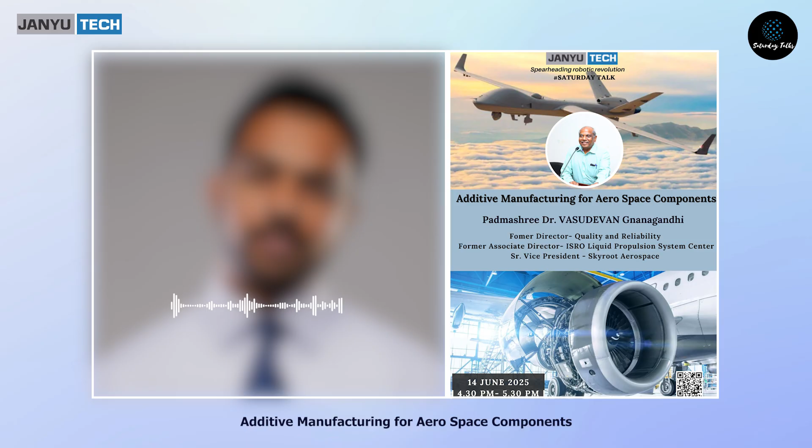He is involved in the realization of hydrogen bus with Tata Motors and has conducted the first trial run. His strengths are giving lectures on rocket propulsion. At present, he is associated as the Senior Vice President, Propulsion at Skyroot Aerospace as well. And today he is going to speak on additive manufacturing for aerospace components.

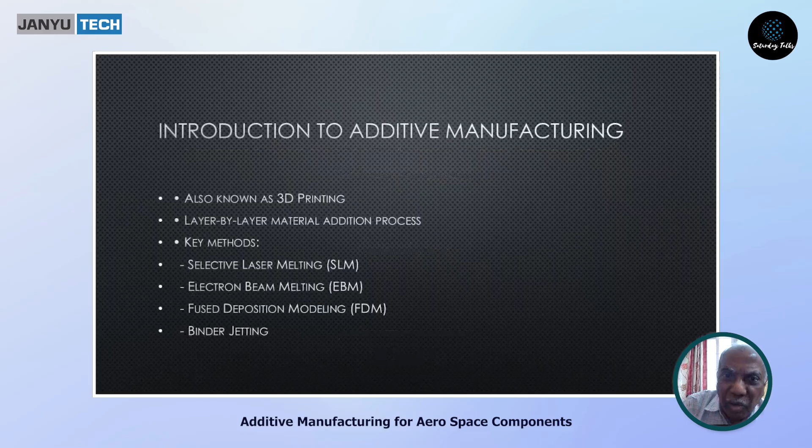Then you may ask, why do we require this 3D printing for our aerospace first of all? Even though it is additive manufacturing, some people call it 3D printing or layer by layer printing. There are mainly 2 or 3 ways: one is direct deposition technique, or bed fusion technique, or electron beam technique. So EBM or SLM - selective laser melting. We call it bed fusion because we fuse the metal with it.

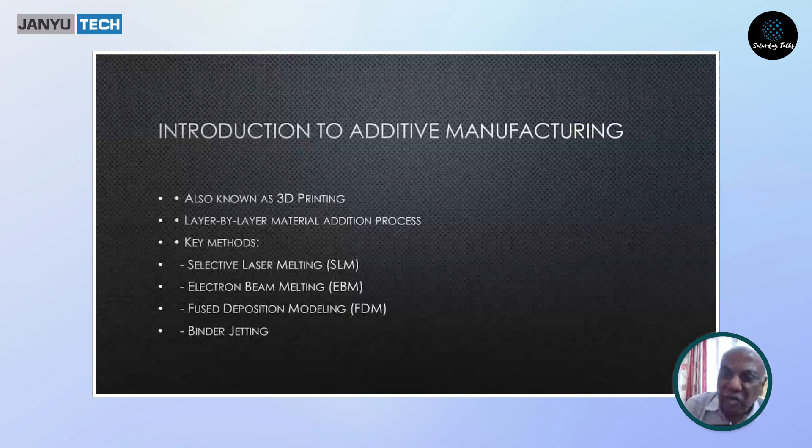So the particular gentleman in Pune, he was having only one machine and he had vast experience in that. So he said, sir, you give me a trial, I will try to do the work.

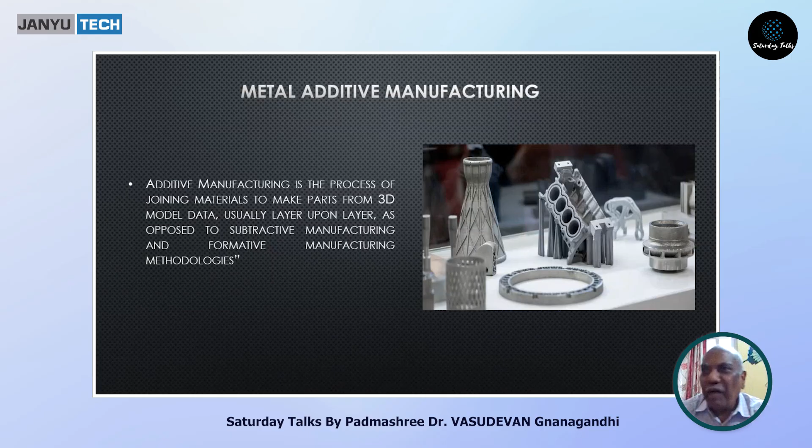We said fine. So this additive manufacturing is the opposite of our machining. Normally, if you want to machine a small flange or a nipple or an adapter or anything, you take a rod or a cube or anything, and we will remove the metal. Finally you get the product, right - using a lathe or milling machine or whatever, you remove it. But in additive manufacturing it is the opposite - layer by layer, we add the metal and bring it to the final product.

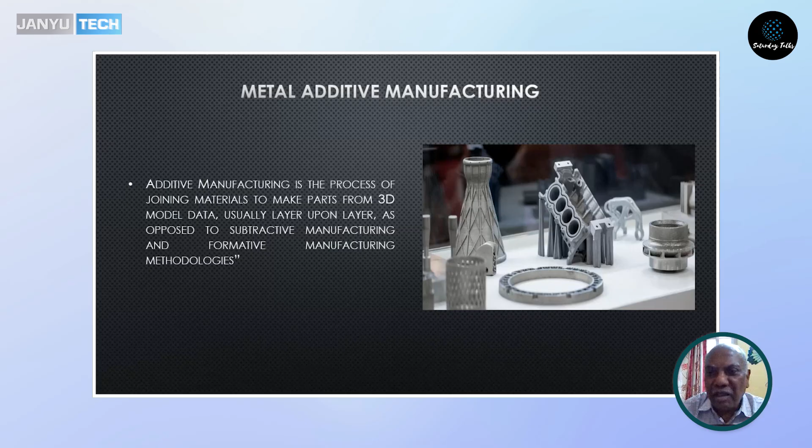The final product is only in the 3D model, not on a 2D drawing where a technician is checking 1 millimeter or half a millimeter - nothing. Everything is in the 3D format.

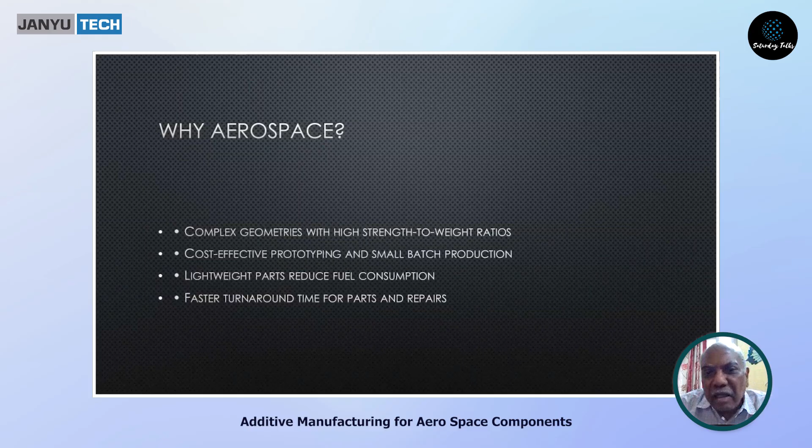So why aerospace is very keen - the very important thing is weight reduction. We can go for exotic materials which we cannot weld or cannot form, but that can be easily printed, specifically titanium or Inconel. And the time taken for producing this type of component is very, very less compared to the normal method - I will explain later how much I have taken and how much this thing.

The faster turnaround for the parts or repair work, whatever you want to do, this was very much handy. So everybody now, especially for smaller thrusters worldwide, people are going for 3D printing engines.

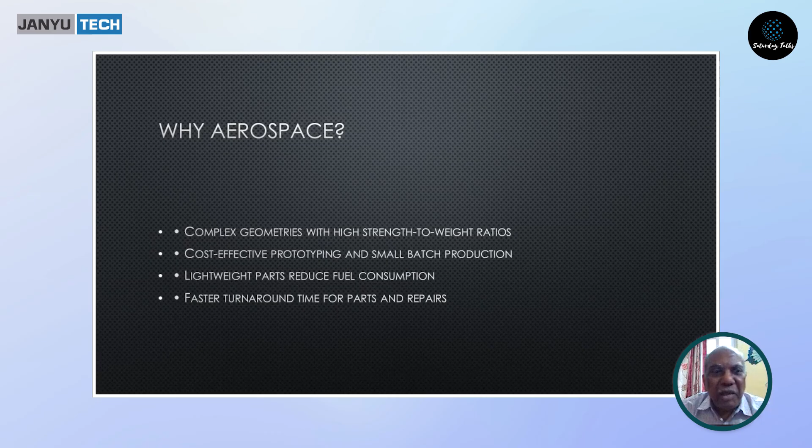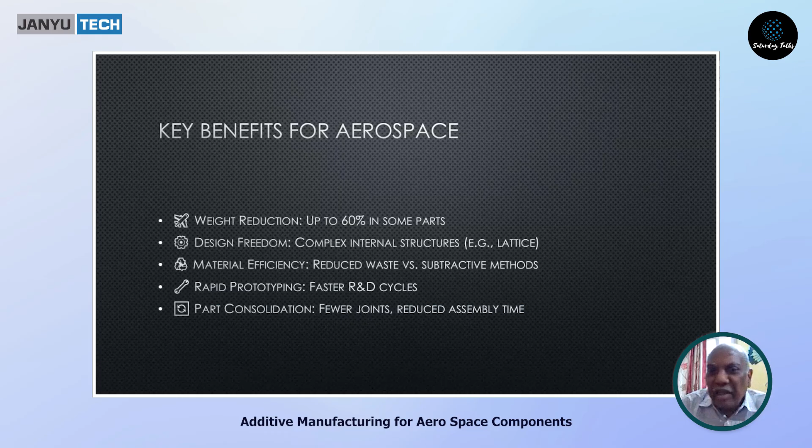Maybe the benefits are, as I said, the weight reduction - even in some places we could get more than 60%. Even very complex internal designs - maybe I will show you one of the injectors, how the internal structures are there. We may require almost like 15 parts, which have to be either welded or screwed or brazed type of thing. In one stitch, we can do it here. So that is very, very important - complex internal structures can easily be made.

And material efficiency - of course reduced waste. In the subtractive method, that is the machining method, we lose a lot of material. You may take 20 kg and finally your product may be 1 kg. But here it is not like that - you may take 2 kg and you get 1 kg product. Why that also 2 kg, I will explain it later. So like that, we have a lot of benefits.

As I told, many parts can be reduced - so fewer joints, reduced assembly time. So one injector, earlier we may take 2 or 3 days to assemble. Now it is already in assembled form we are getting.

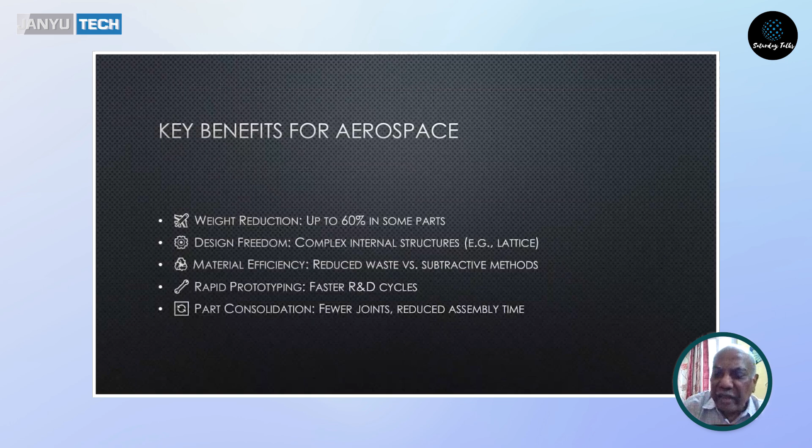So that kind of flexibility we have. So the major process which involves in component making - first of all, the AM design itself is slightly different from conventional. Suppose if you want to make an injector or a thrust chamber or a component or any body, anything you want to make, you have to think, because this is layer by layer in this form.

So during forming, if any taper is more than 45 degrees, a lot of support is required to hold the layer. So then it will be a little difficult. Then corner radiuses, or maybe a square where it is coming and meeting very perfectly - there are joint points that has to be done.

Now, of course, a lot of DFAM softwares are available, and people have started using them. Once the design is over, it is fed to the machine, where the process parameters - this is very important because this is process oriented, and there are a lot of gaps or disadvantages. Maybe I will touch a little bit on that towards the end of my talk.

So the metal feed is only a powder, and whatever material is required - for example, you take titanium, we have full alloy as well as half alloy. 6Al4V is called the full alloy, where 6% aluminum and 4% vanadium is mixed, and half alloy is almost half of that percentage, with the remaining being titanium.

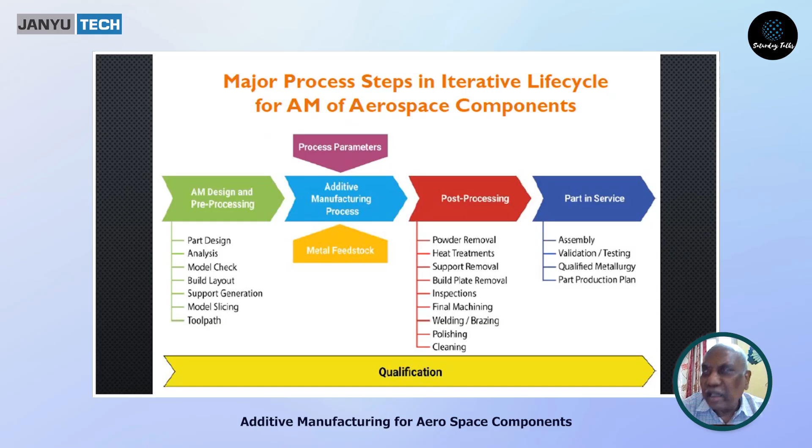So that also we apply in some places. We use all those things - cleaning and polishing, all these things will be done. And some machining is also required for post-processing, like thread cutting. For an injector, I have to assemble a valve or something, so I may require a groove if it's a flange, or a thread. So that has to be done by conventional machining for further processing.

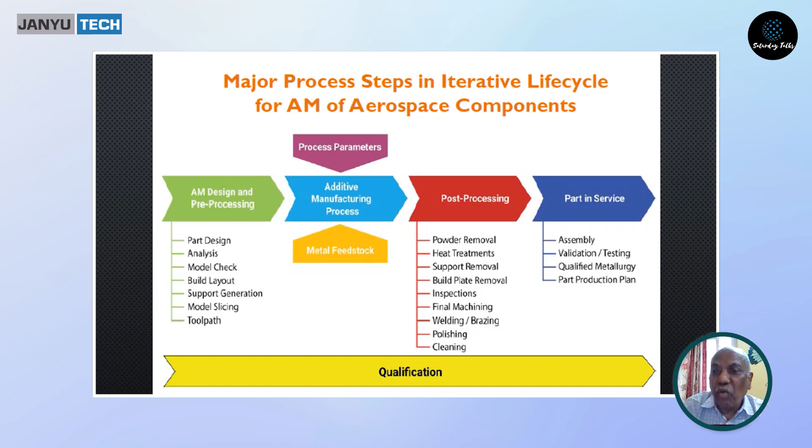And qualification is another big area - we will touch upon that. So as I told, there are many more techniques also there. One is called cold spraying, another one is powder bed fusion.

This is the one widely used in India, mainly in places like Bangalore, maybe also in Bombay, though I'm not sure.

This powder bed fusion uses high energy sources, either electron beam or laser melting. These two are used in powder bed fusion. Another one is directed energy deposition, which is the latest one.

For electron beam and laser beam, we require a very controlled environment - it should be vacuum to create the electron beam. But if you want huge components, it is very difficult to have that. So now in the US, they have started a directed energy deposition (DED) process, where the powder is enveloping the gun or source of power and is deposited directly as a component.

Maybe a little later I will touch on this - you can also take up one of the projects in DED.

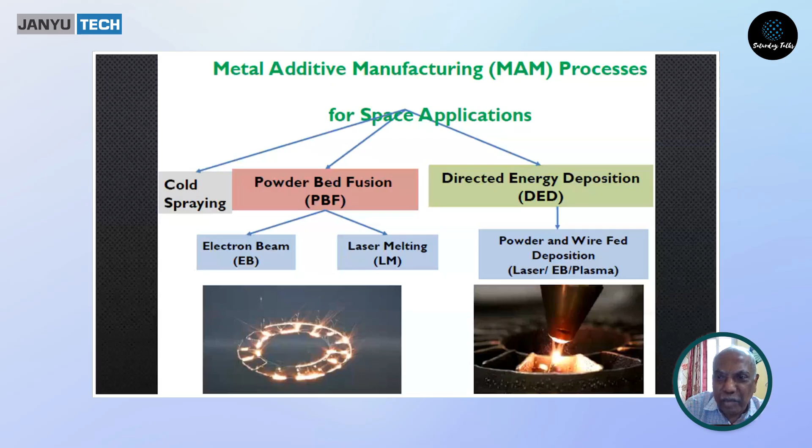In powder bed fusion, as I said, there is powder, and one layer may be from 20 micron to 100 micron thick. That much of one layer will be laid on the bed, and the laser beam melts it to form the component. Layer by layer, maybe about 50 micron each time, the fusion is completed, then a fresh layer of powder is put over that and fused again. That is the technique used in powder bed fusion.

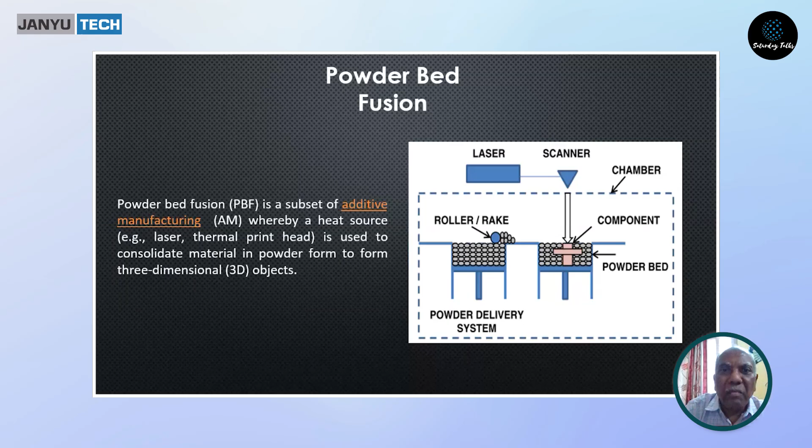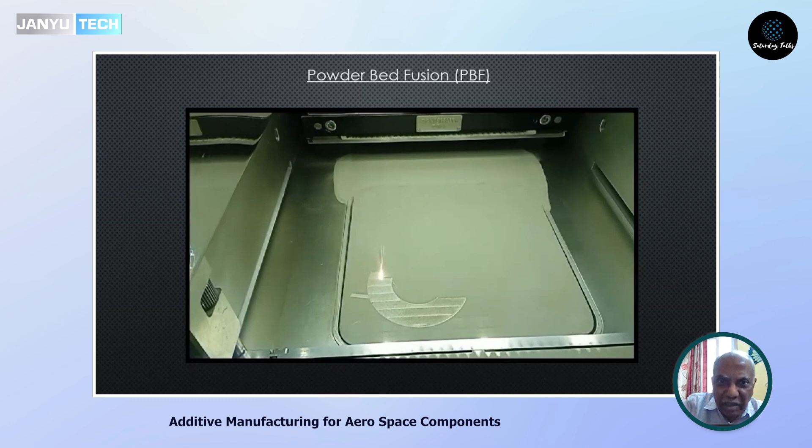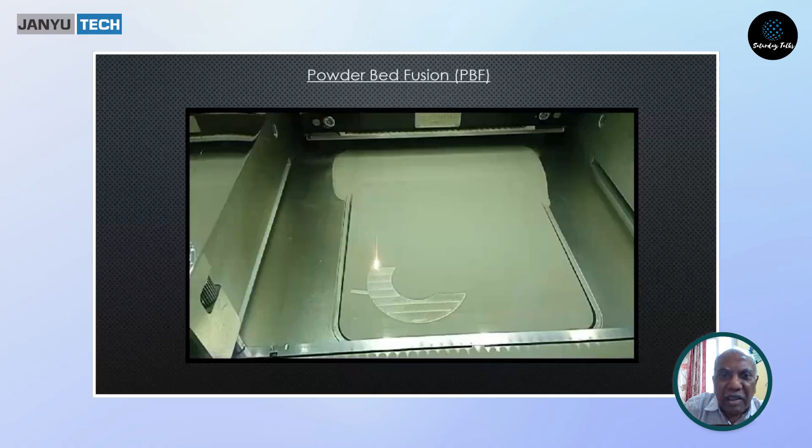You can see this is a machine in Pune used for our own thrust chamber. We asked them to do a trial run, and they completed it. On the other side, you can see the powder-putting mechanism of the machine. This is the technique - laser melts wherever required, and the remaining portion is left as powder.

The next one is cold spray. This was tried long back in ISRO also, but we could not succeed much. Currently DRDO has a machine for this. It doesn't require a controlled environment like the other processes.

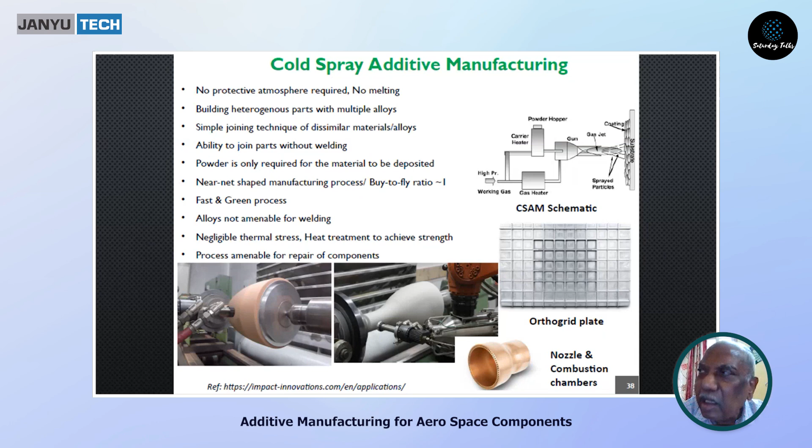This is a very important technique we are considering, because currently whatever engines we made in Skyroot are all very small size. If we want to go for a 100-ton or 50-ton engine, the size will be huge, the combustion chamber pressure will be very high, and the heat transfer will be a high amount. These materials like Inconel and others cannot work in such conditions.

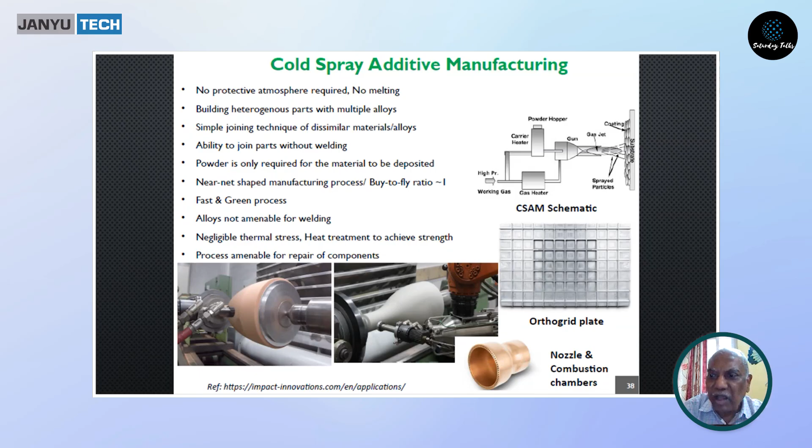So we require copper inside, since copper conducts heat very fast, but copper cannot take that much load. So we need copper inside with grooves, and a high strength metal outside. Double material joining is still not feasible in printing. So what they generally plan to do is print the copper first, then do cold spray over that. We are trying this technique for our future requirements.

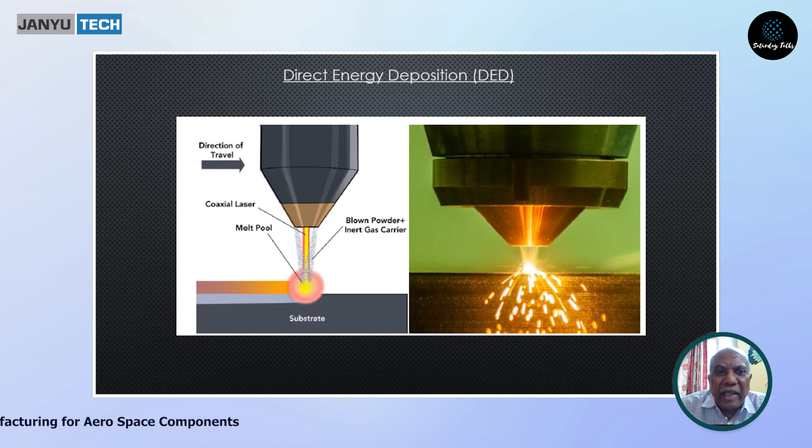This is the direct energy deposition method. You can see on the left hand side, the inner core is the laser, and the outer part blows inert gas with powder. The powder and gas are blown out, and in the melt pool it melts - similar to welding, but here instead of a filler rod, we use powder. Some people also use a rod instead of powder.

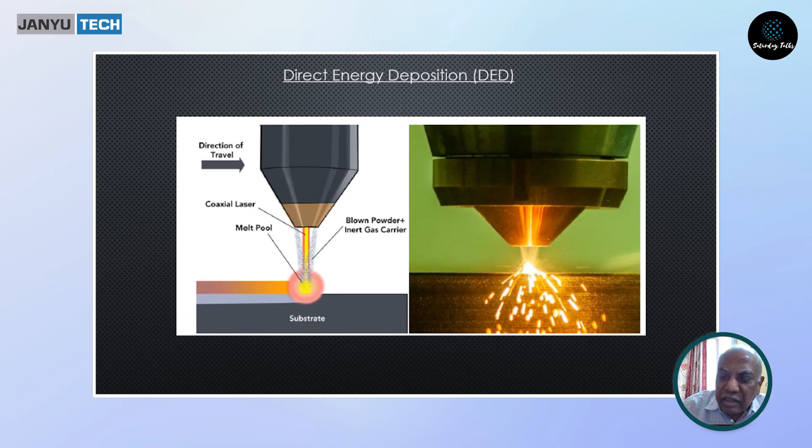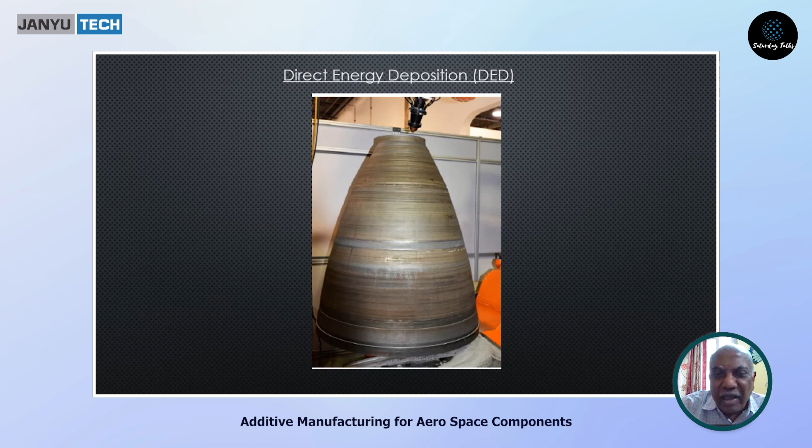So maybe you can take up as one robot you can develop for depositing this type of gun. That will be more useful for our future requirements. This is what I want.

You may ask: conventional bar and rods and other things, if you are 3D printing, what will be the strength? Whether it will be like a cast, since it looks like you are depositing. Casting is always very less, so here also it will be like that? No, because after the heat treatment, sometimes I have seen almost equal or even more, or it will be plus or minus 5% to nominal values we are getting.

So that is one of the very good things. You can weld it, you can do whatever you want like any other material. So the printing is only helping, and strength wise or the percentage of elongation, it is not at all coming down by this process. So widely we are using Inconel 718 as well as Ti6Al4V, and Hastelloy also we are trying to use.

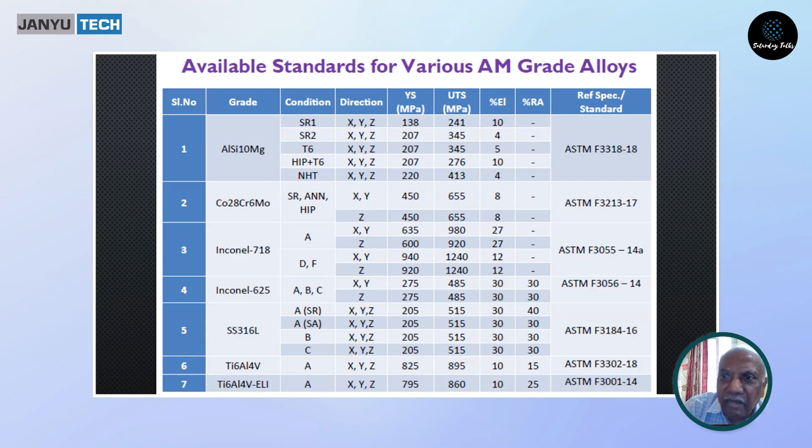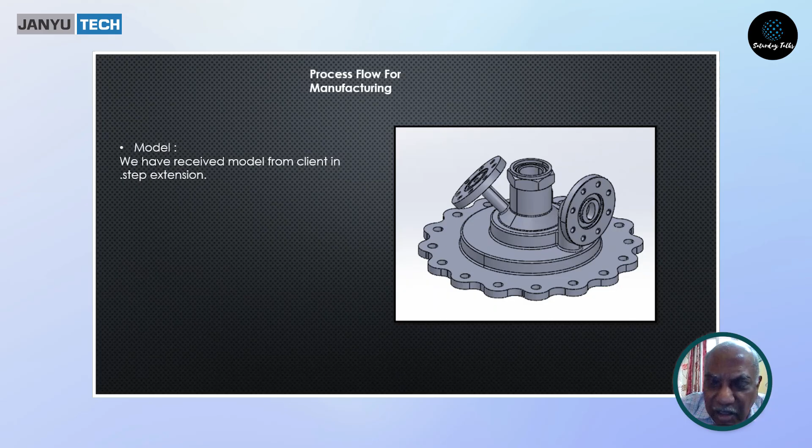So these are all the material properties also. We have done extensive studies by taking a lot of samples and putting them in low temperature and high temperature, all these things, and we have a good database now for 3D printing. And I will take one case study. This is one of the injectors for our small engine. It can develop 850 Newton thrust.

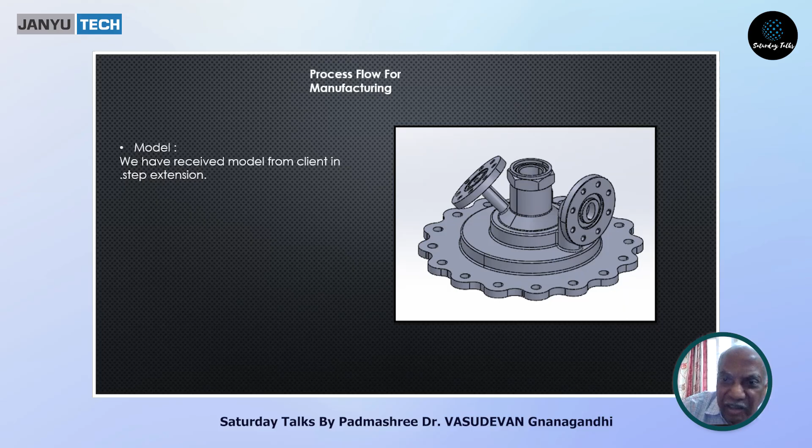So first, you have to make a 3D model. Nowadays all engineers coming out from any college can make a 3D model. And internally, if you see, the center is for oxidizer. The N2O4 will come and bifurcate into two lines and then it is coming. I have shown it is not a circle, it could be elliptical on the top, because otherwise, as I said, the design has to be properly made.

And similarly on the right hand side, you see another pipeline. Through that, fuel is coming. Again, it is all around, and you could see the fuel orifices. This is the oxidizer orifice. So the orifice sizes are in the order of about 1 mm or 0.8 mm. That particular hole alone, the powder will not be melted.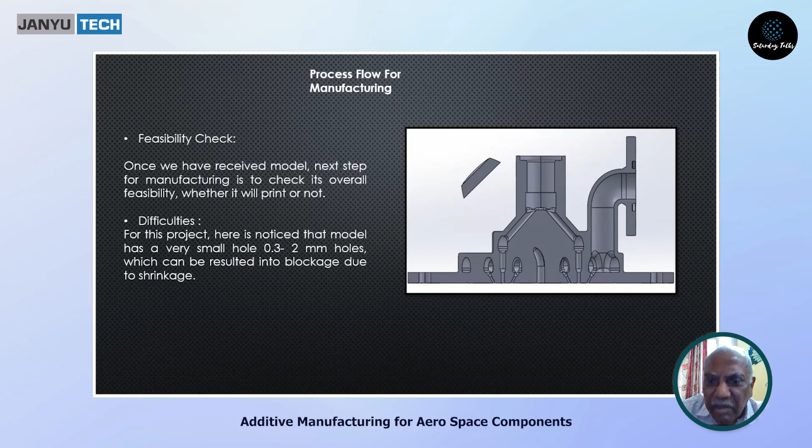We had a lot of problems, because when it is made the heat is so high, and when the heat is reduced, the shrinkage factor will come. So if you want 1 mm, it may become 0.8. So we studied a lot. We cut the specimen, how much it is going and all those things. So now we have a handle on what you want and how much you have to give in the drawing. So this is also one of the design criteria, how much shrinkage is taking place. This also we have studied and we have done a wonderful thing.

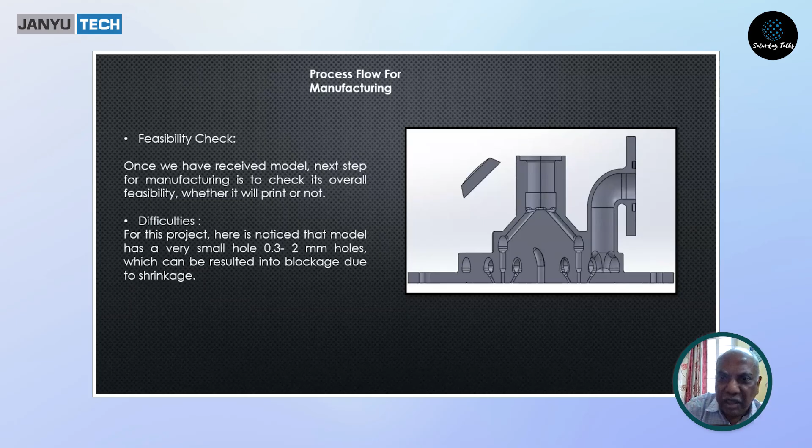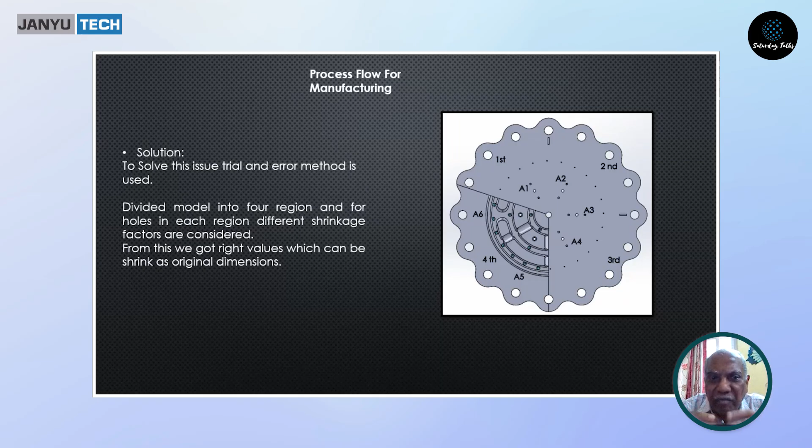You could see this is an injector with a one-third cut view. You could see internally how the propellant goes in different places. That's why I said earlier, we might have done many pieces and welding and all those things. Now it has come in a single piece.

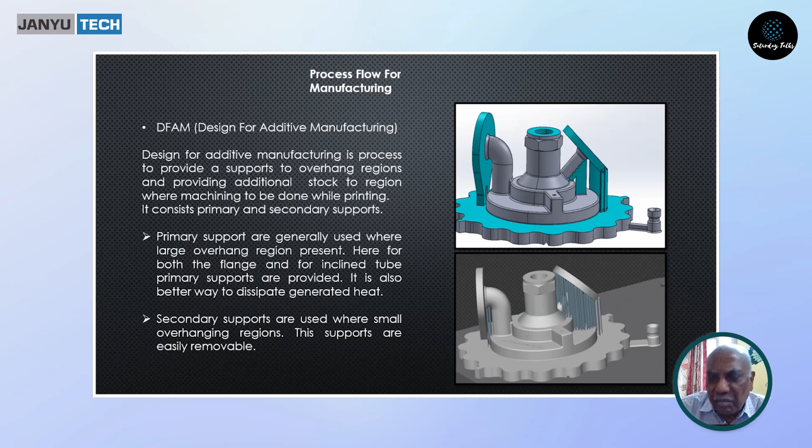So when we are talking about design, you could see one flange; if I put it, some supports are required. Otherwise, that will not stand separately. Later, the support can be removed. So the removal of the supports should be minimum possible. So the DFAM study we used to carry out.

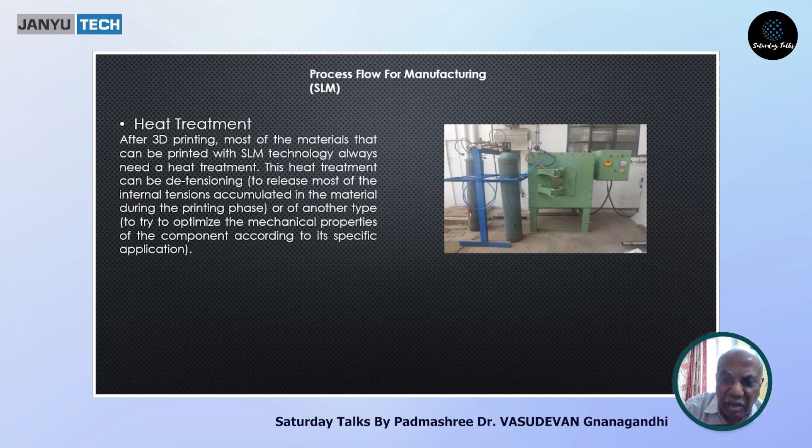And this is the one I said, that after completing the process, we will do the heat treatment. The heat treatment is very, very important, and it has to relieve the stress. Otherwise, sometimes if it is a thin structure, warping can come. So to avoid that, you have to do heat treatment. If it is required, we can go for HIP also. But currently we are not doing HIP, heat treatment itself is giving very good strength. And this is all post-processing. We have to remove all the structures all around.

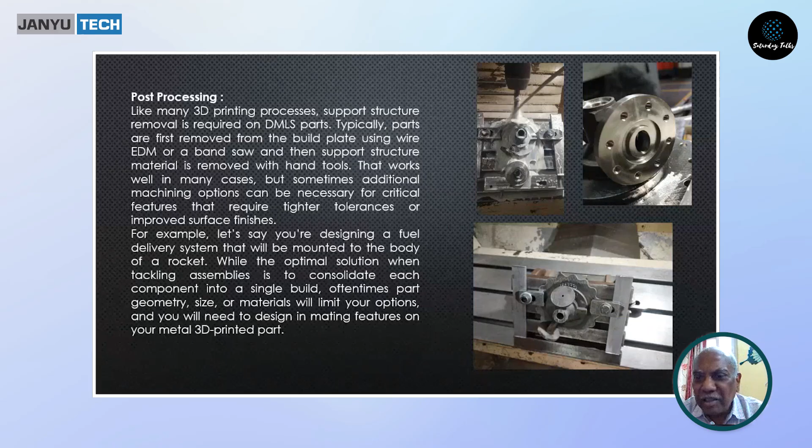Maybe I will show you later how the structures are built, how much we have to remove. Then conventional machining also we have to do. So finally, this is the product. We got the groove machining and the thread machining. These two are conventional machining we have carried out.

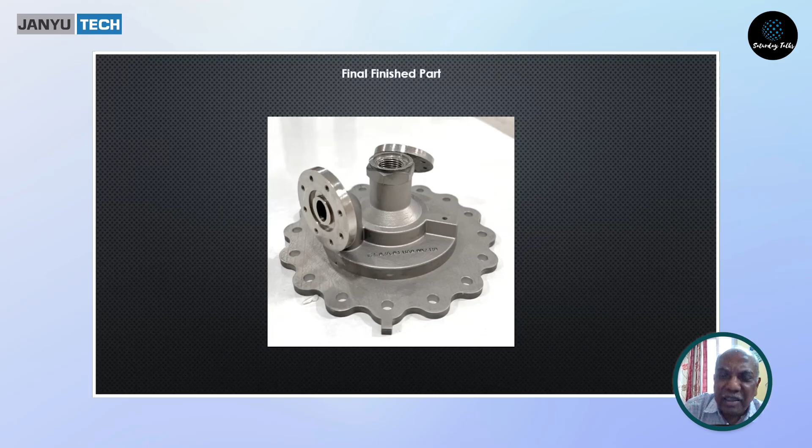You could see the surface finish, and we could get approximately around 0.8 micrometer in Ra. So that's okay. If you are doing machining, you may get a better finish, I'm not denying it, but outside it is not required that much. So it is okay for our requirements, and we are going ahead with this one.

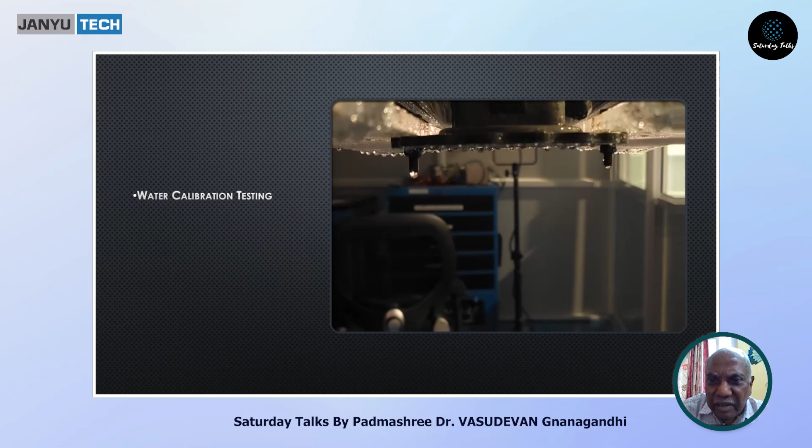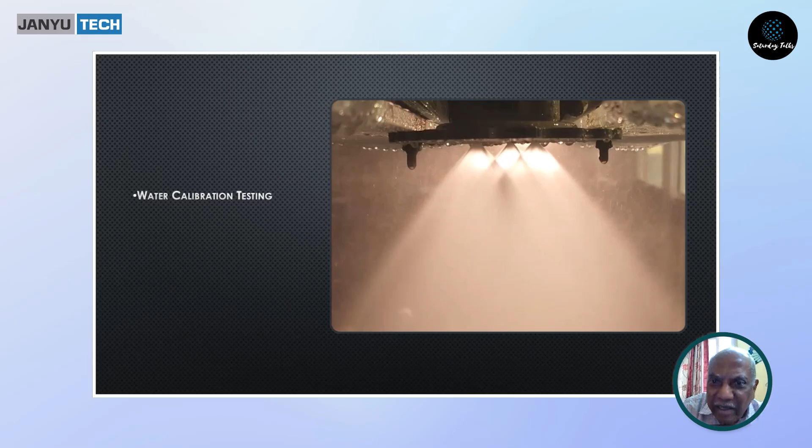For acceptance, we used to do a water calibration, because the orifice is the main thing, especially for rockets. So you could see, as printed, we have not drilled the hole again or anything. We could get a beautiful jet.

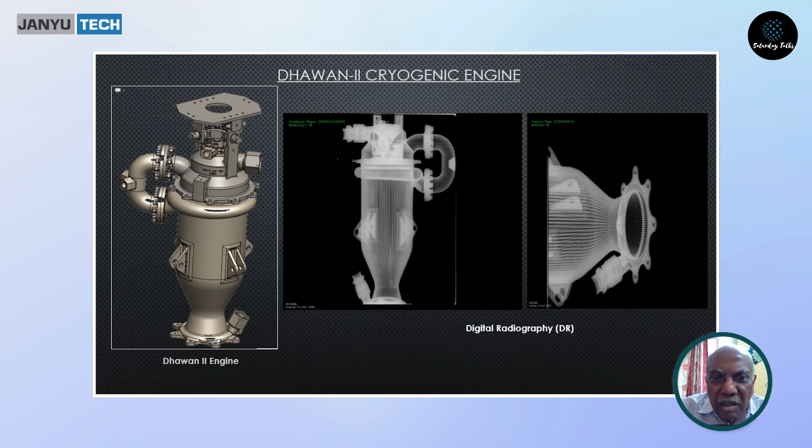And another one on the left hand side, what you are seeing is the cryogenic engine. It is 3000 Newton, and we have done digital radiography or CT scan, whatever you call it. We could see the grooves. This is a double wall, and we want to check whether any blockage is there in the grooves, and in one or two cases, minor blockages were there in a few channels.

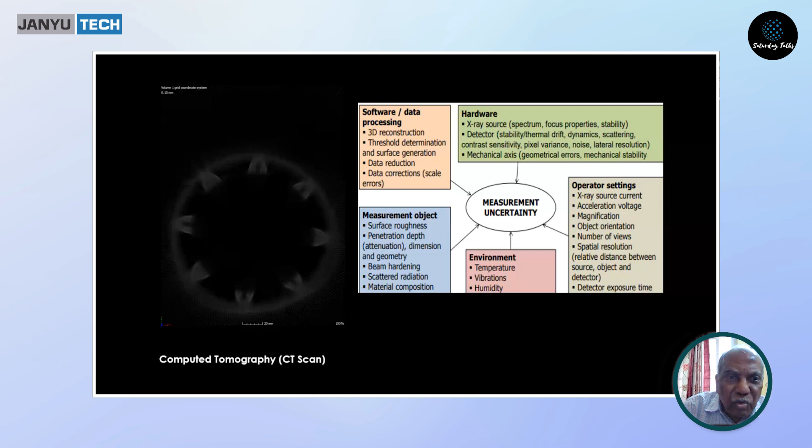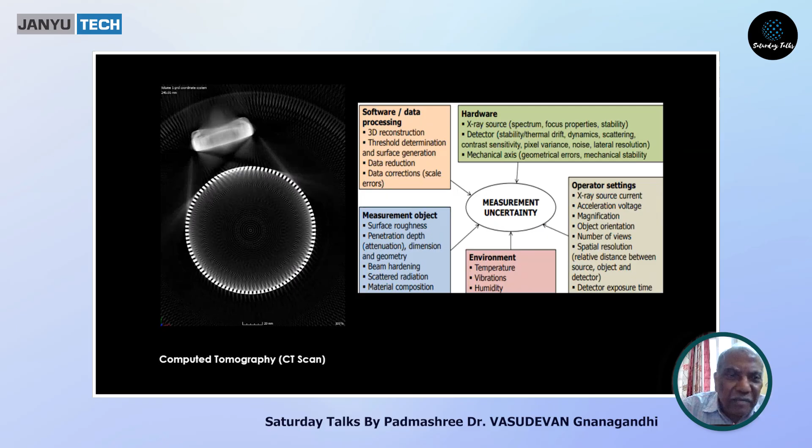Okay, I took a decision. It may not be a problem. We can go ahead and do the work, and it does the work. So clearly, you could see the CT scan on the left hand side. This machine is available in DRDO, and they have done it lengthwise. It is like a CT scan of the human brain. Same way, we did it, and we could find out if any flaw is there.

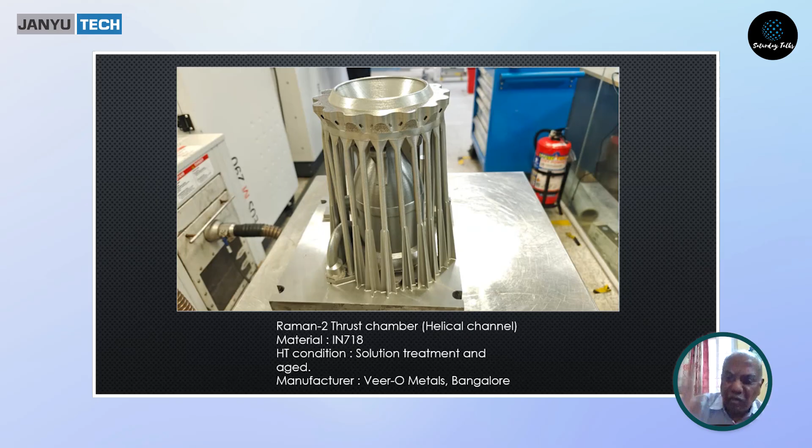So you could see, as printed, all around these are support structures that should be removed. And at the bottom also there is a plate; it was built from the plate. So that plate and whatever you are seeing in the line also has to be removed. Now after that you could see how the engine will look. And finally we hot fire these engines.

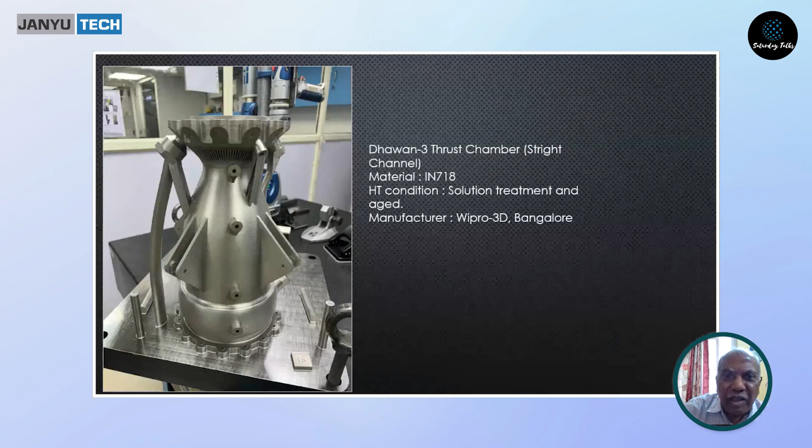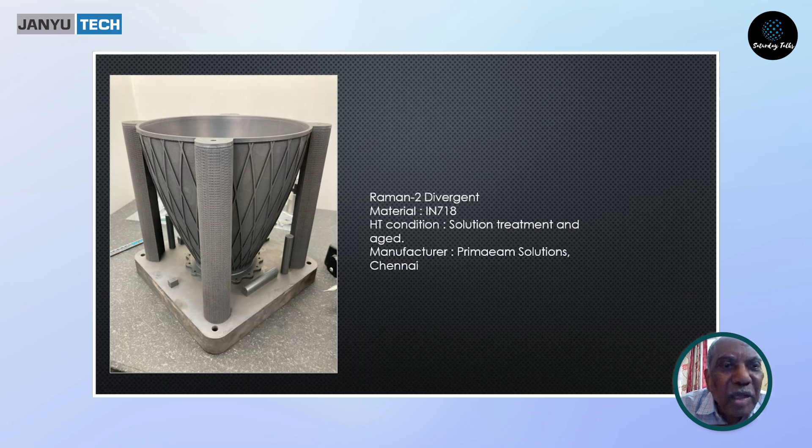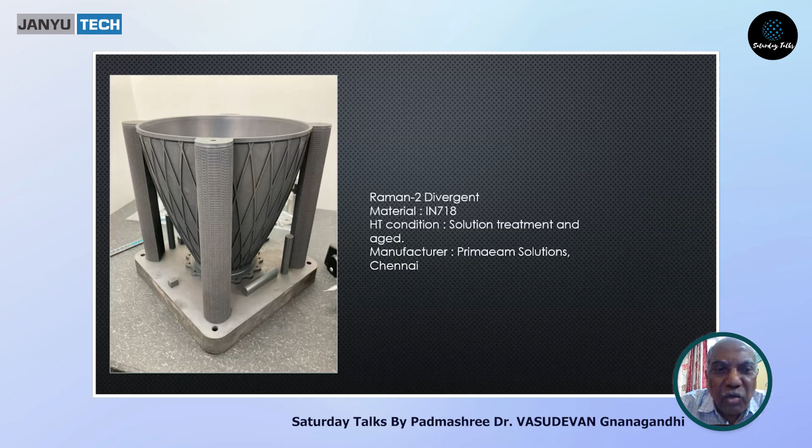You could see one of the divergents. We took a lot of time to make this divergent with Haynes 25 alloy, because with a super alloy, when you make this type of contour, at least 3-4 times you have to do heat treatment and improve the flexibility, then only it will be formable. So it takes almost 2 months.

But this particular component takes only a few days. Our printing is only 2 or 3 days, and heat treatment, cleaning and machining take only another 1 week or 10 days. So this thrust chamber also we have tested already in our test facility.

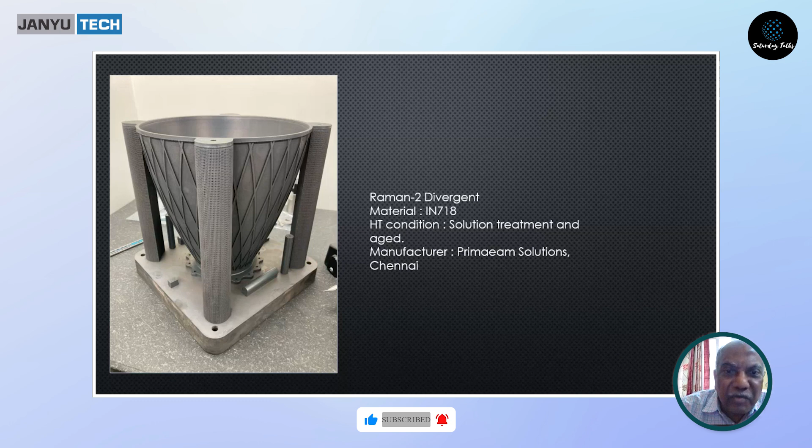And one area is, this is a process-controlled thing. Once you set everything, the powder, and even online defect detection inside. Currently, no machine in India has this kind of detection. So defect detection is one of the very big question marks today. How to detect? There are a lot of gaps, because the powder size and shape are very important. Moisture content: even a minute amount of moisture can cause a lot of defects.

So we have to be more careful with the feedstock. It has to be properly stored and all those things. This is one of the important things. The second one is the process parameters: the variables in generating power, vacuum, the movement of the gun, everything. Once it's set, fine, it will make even very high numbers. So there are certain gaps.

And currently worldwide, if you take welding, we have so many acceptance norms: how much mismatch, what are the defects, how big a size you can accept, what minor pore we can accept, what is the maximum pore, cluster pores, all are already documented. But in this area, we are only starting, so no good level of acceptance norms is available. So we do water calibration or a hot test, then only we accept it.

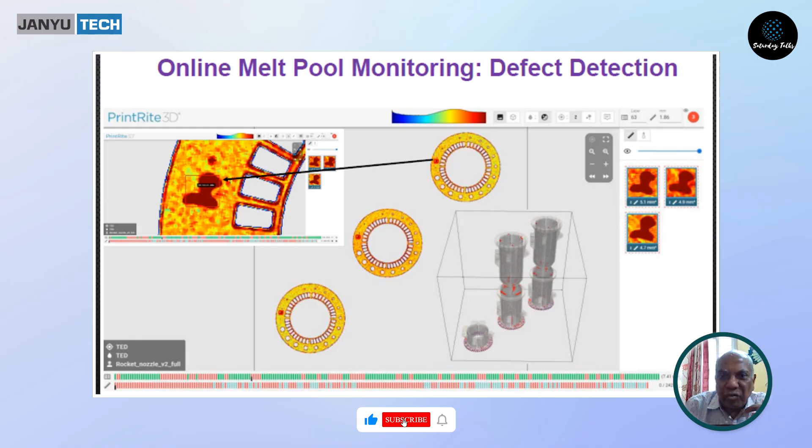So this is one of the engines. We did it with liquid oxygen and LNG.

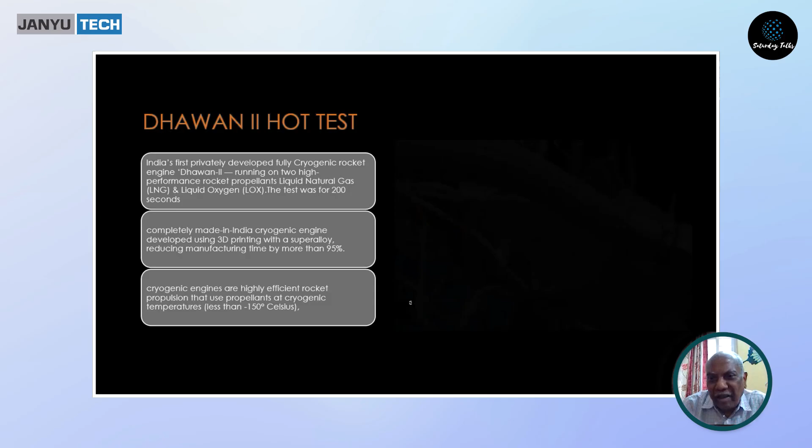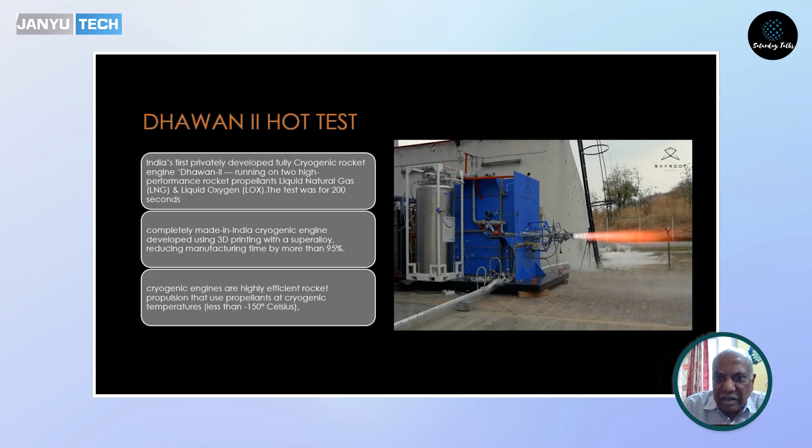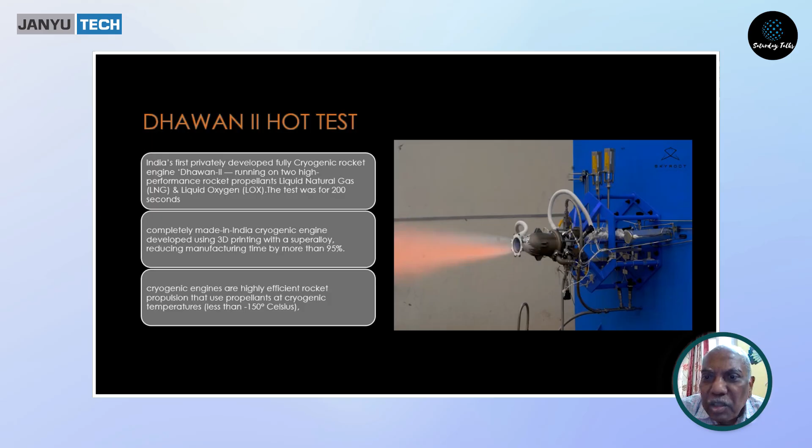First time in India, of course, I tried this combination, and this engine was tested at Nagpur, and you could see the logs. We tested this engine very successfully for 200 seconds in the Nagpur facility. This is the inlet, you could see LNG is flowing, and then it is coming out, and then it is going back. So the valve, whatever you have seen, is only for that.

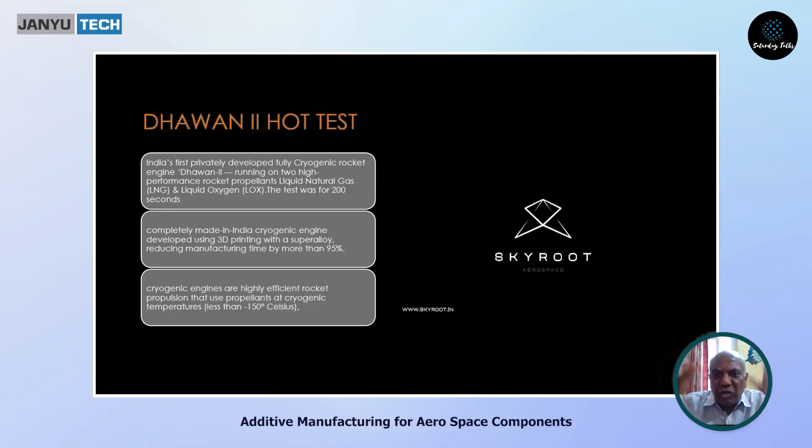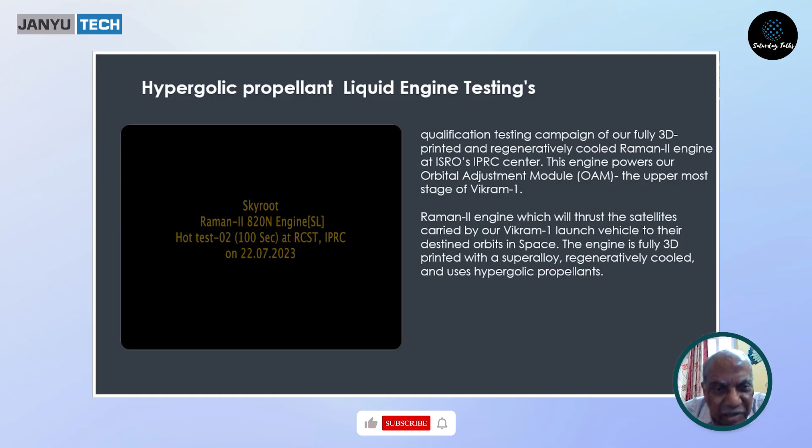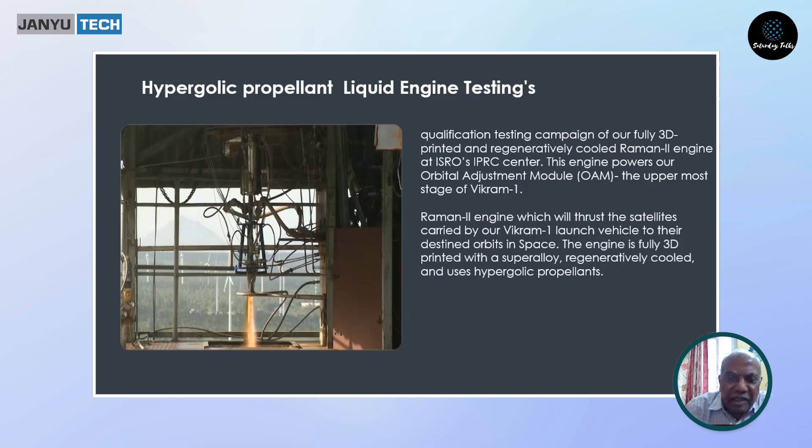For bigger engines, inside it should be copper. So that technology only we are trying to make. This is a hypergolic propellant. That also we made only with Inconel 718. And this is tested at Mahendragiri near Kanyakumari. You can see the background, lot of windmills, and this is also very perfectly tested. Now currently we made our own test stand, and we are doing this hypergolic propellant at Hyderabad.

And these are all 3D printing, what for the last 6 years I could learn a lot. So I want to share with you what my engineers and I have developed. Maybe in your area, if any critical items are there, in my opinion, 3D printing is the best way of doing it. Thank you very much for patiently listening to me.

You talked about process control, etc. Is it possible for us to build digital twins for specific steps in the process and then improve the modularity and scalability of 3D printing? That's my question. The problem is all machines are imported. No one wants to touch, or I would say it is slow. I think one person in Pune developed a machine himself, so he is trying to do improvement. What you said is really correct. Most of the parameters, like the power, you can fix.